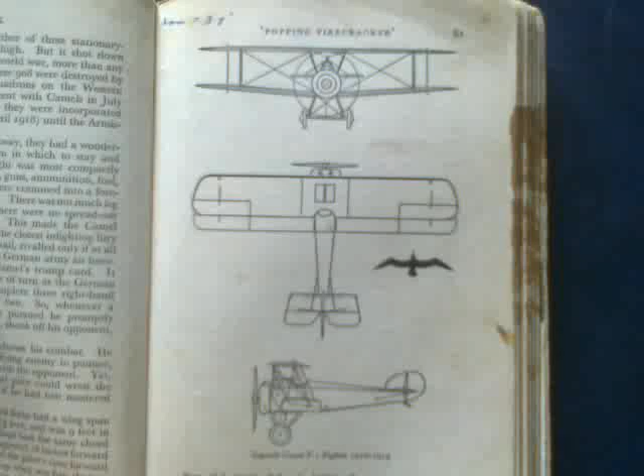Welcome to the second part of my in-depth little warbird series about Sopwith Camels. Those of you who watched part 1 will be aware that part 1 and part 2 are based heavily on text written by Wing Commander Norman Macmillan in Great Aircraft, published in 1960. Part 1 being Popping Firecracker.

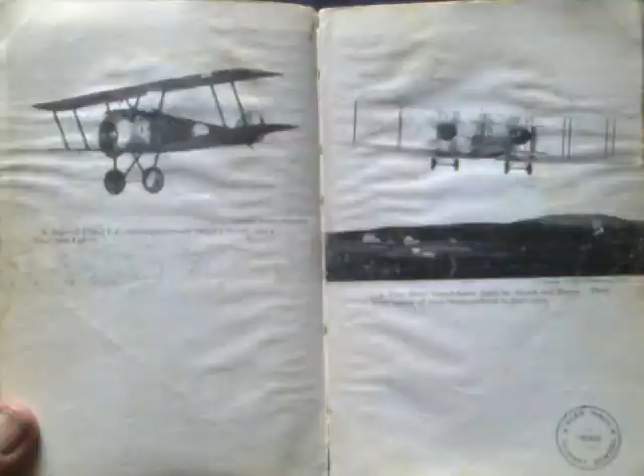Today's video, Ubiquitous Fighter. Once again, I will read from the prepared photocopy, and because this line drawing and this black and white photograph, captioned Sopwith Camel F1, contemporaneously called a Scout, was a single-seat fighter, comprise the only illustrations of Sopwith Camels in Captain Macmillan's otherwise brilliant book.

So I won't be hesitating to dip into my stash of Sopwith Camel photos in various reference books, which I have collected over the years.

Chapter 6, Camel, Ubiquitous Fighter. As twixt two equal armies, fate suspends uncertain victory. From The Ecstasy by John Donne.

The Camel was one of those lucky strikes that turned up sometimes among the varied products of aircraft manufacturers in those unpredictable days when science had not quite overpowered art in the drawing office, and an aeroplane could still be built from the drawings chalked on the wall or the floor of the erecting shop, and a prototype might fly only 3 months after the conception of the design in its creator's mind.

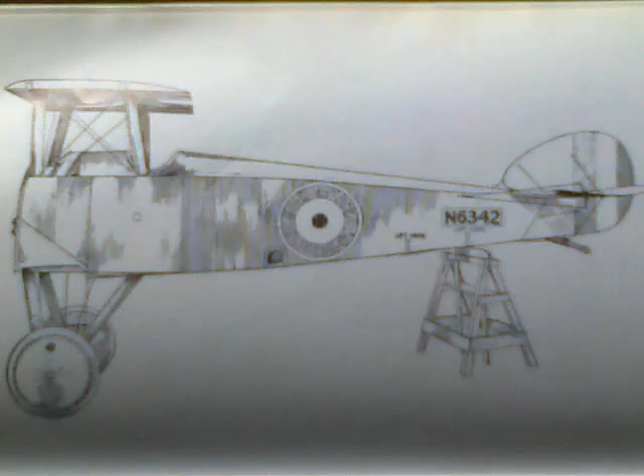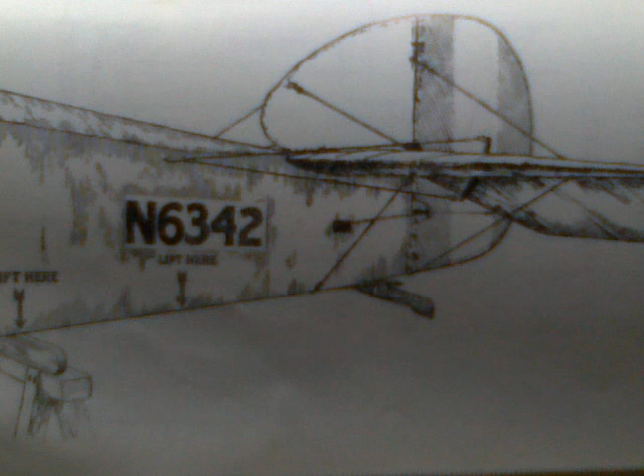There was nothing very unusual about the construction of the Camel. It conformed to the practice of its time when aircraft factories smelt deliciously of clean timber and the sawmill. Its fuselage had 4 ash longerons, square in section and curved lengthwise, to the outlines of the body, which was shaped, either in side or plan view, rather like a coffin.

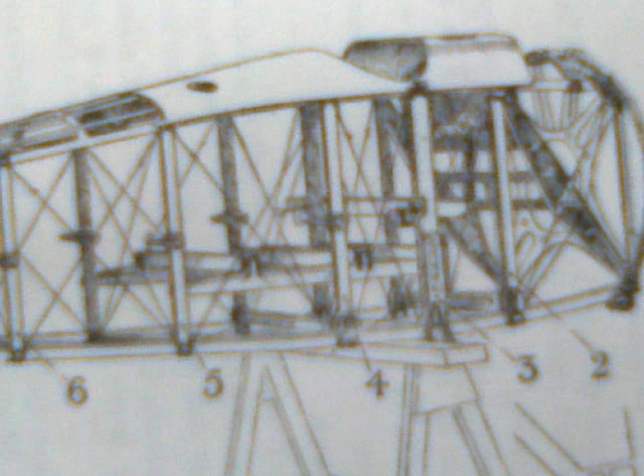These longerons and 8 sets of square section spruce struts, each set containing 2 side and 2 cross struts of the correct length, were the timber components of the fuselage girder. The struts were located on the longerons by steel plates, through whose eyelet holes piano wires were reeved for the internal and top and bottom cross bracings and the side bracings. Each wire was tensioned by a turnbuckle. By correctly adjusting these turnbuckles, the riggers trued the fuselage into correct alignment.

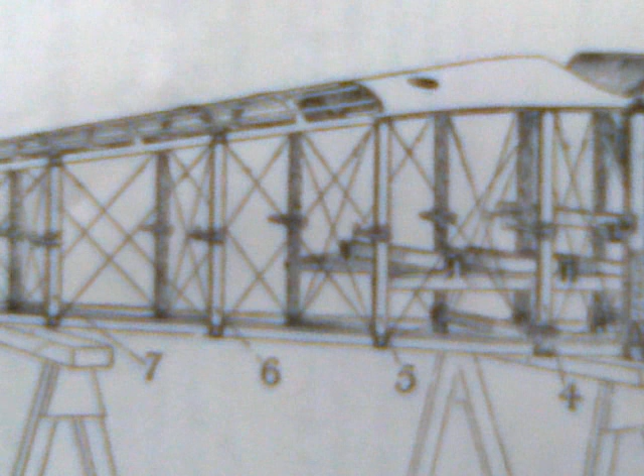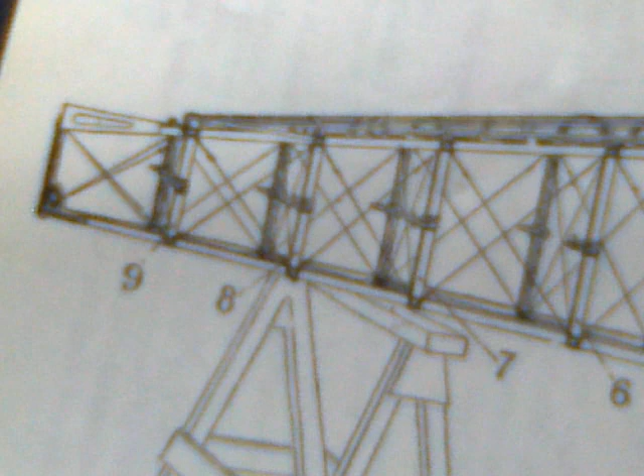A steel vertical rudder post accepted the merging bottom longerons at its lower end, and its upper end similarly accepted the merging top longerons, which here were reinforced by the wood mounting base for the tailplane. By its nature, a rotary engine overhung its mounting. This demanded a good cantilever installation. In the Camel, the one-piece longerons were continued forward from the first set of struts already mentioned to form the engine mounting bay. Their front ends were interconnected on each side by a vertical wooden strut.

Steel fittings on a 3/4 hoop of steel tube that curved over the flat sides and top of the fuselage girder, but not underneath it, linked all 4 longeron ends to this hoop. To this assembly was added the front engine mounting, a steel plate in the shape of a St Andrew's cross, but with a central hole, and the centres of the arms cut out for lightness. In place of the side bracing used further aft, the engine mounting bay was strengthened by a stout wooden strut running diagonally between the front lower corner and the rear top corner.

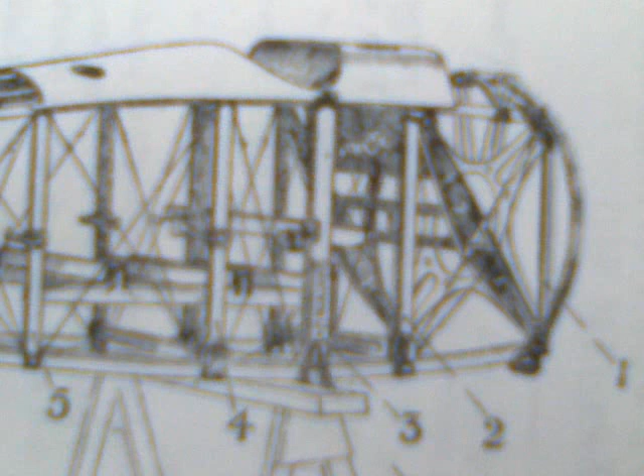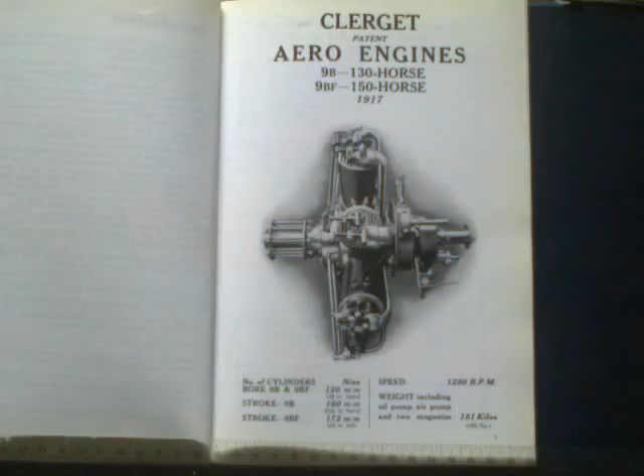To curb elasticity further, these diagonal struts were braced with fore and aft cross wires and laterally by protruding kingpins and wires. The rear steel mounting plate for the engine bolted to these diagonal struts ran centrally across the fuselage within the bay. The rotary engine was mounted in the aircraft by two circular steel plates carried on the rear hollow extension of its fixed crankshaft. The circles of bolt holes on these plates coincided with those on the two steel mountings in the fuselage.

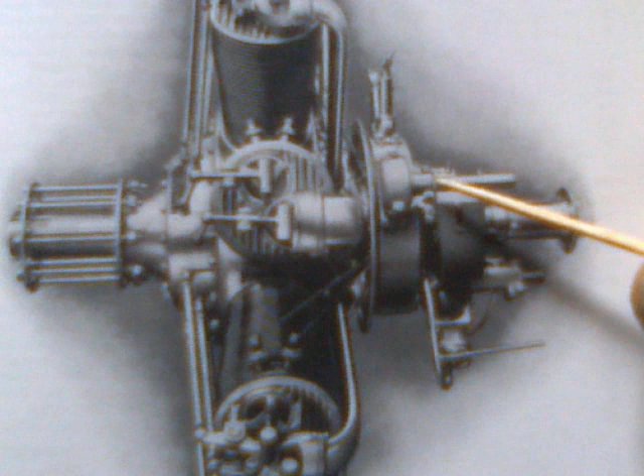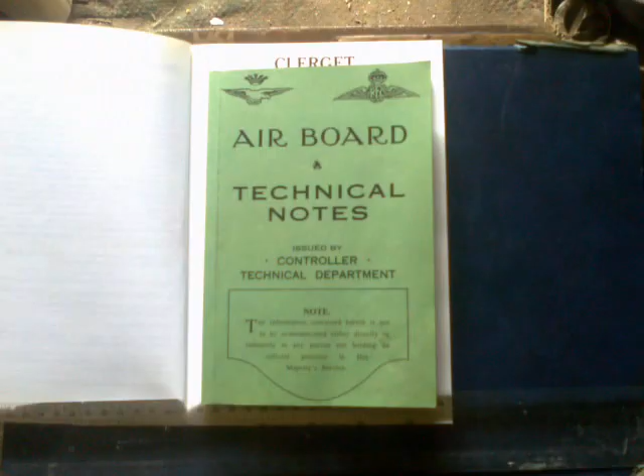Okay, I know it's rude to point, but these are the holes there, and I think there, perhaps around there, but those two steel plates, they hook on. A large plate bolts into that circular hole there, and in that cross member there, there's a vertical support in the centre which can't be seen because of that strut in the way, and the little end bolts onto there. I think that's how it goes.

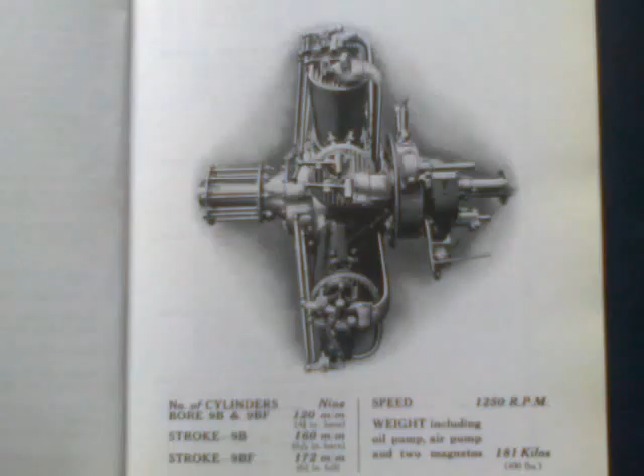Never having laid hands on an actual Camel, a reproduction replica Pup with the wrong engine was as close as I ever got. A simple block tube carburettor was mounted on the open rear end of the crankshaft.

Petrol was fed through a fine adjustment to a jet at one side of the carburettor. From the opposite side, a throttle slid across the opening with a tapered needle projecting in front. This needle altered the flow of petrol through the jet as the throttle setting varied. By manipulating his throttle and fine adjustment levers, the pilot controlled his engine and compensated for varying altitude.

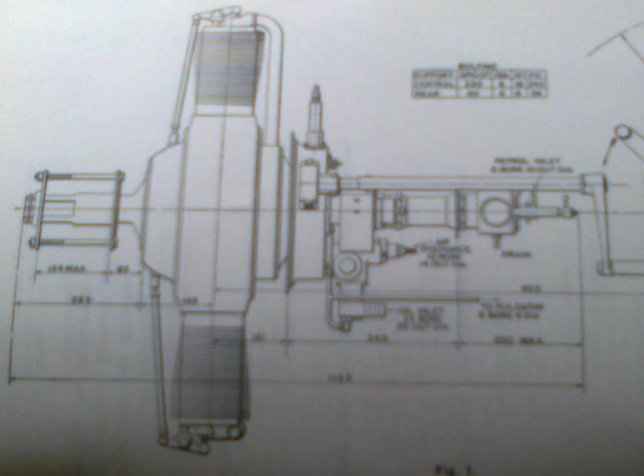By bad handling of these controls, it was quite easy to stall the engine at takeoff or in a manoeuvre, and the novice needed careful tuition in their use. The carburettor sealed the end of the crankshaft and drew its air from both sides through a cylindrical gauze filter just behind the throttle. Rubber connections carried aluminium extension tubes across the fuselage to draw air from the outside.

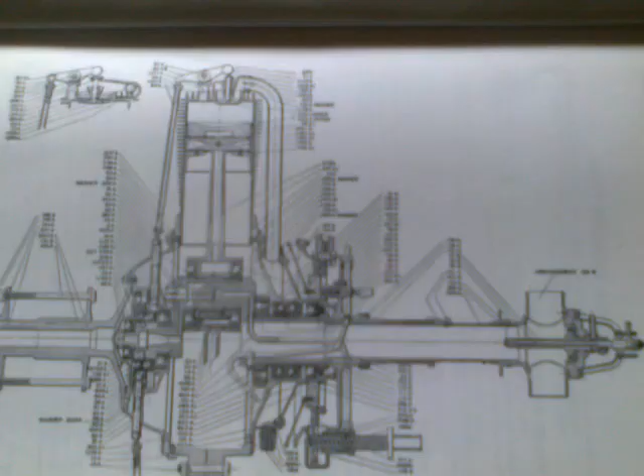The open ends of these intakes are always visible in side views of the Camel, one on either side of the aluminium cowling just ahead of the pilot's cockpit. The other one, of course, is for empty cartridges and spent links to come out from the guns.

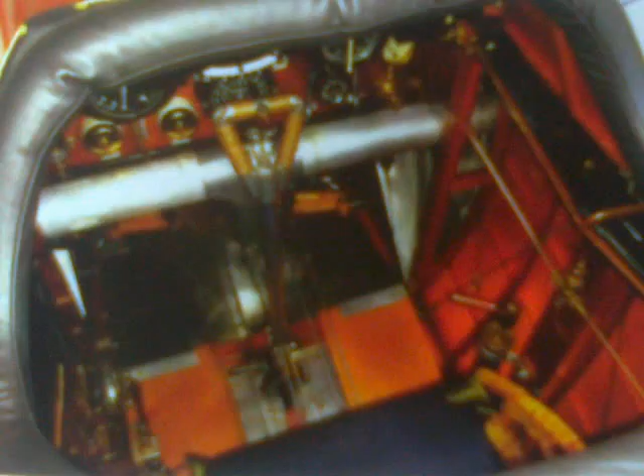These aluminium air intake extensions were the bane of long-legged pilots whose knees fouled them when their feet were on the rudder bar. I have known pilots posted to fly Camels at the front who could not operate the rudder properly because the air intakes obstructed their leg movements, and they had to be sent to squadrons flying bigger machines, such as DH-4 reconnaissance two-seaters.

I have also seen legs broken in Camel crashes by these same intakes, which could not have been more efficiently placed to break the tibia and fibula. The mixture of petrol and air was carried through the hollow crankshaft into the crankcase. Petrol air mix coming down from the carburettor into the crankcase, where it was mixed, heated and partly compressed by the rotating engine and its reciprocating pistons. Thence it was carried to the inlet valve in each of the 9 cylinders through copper induction pipes.

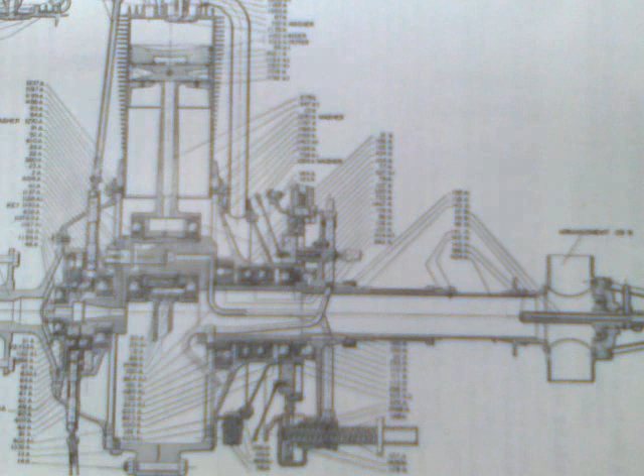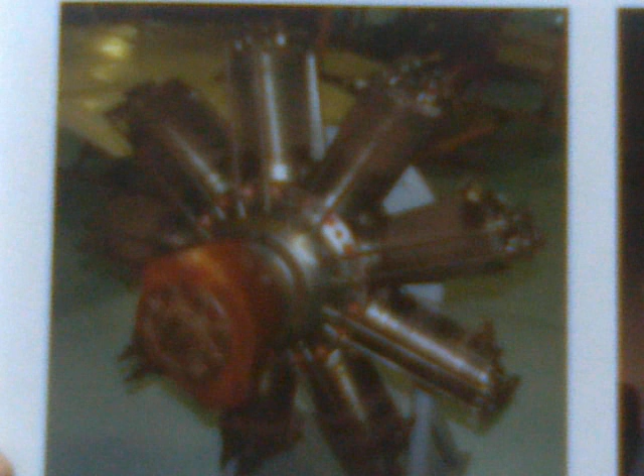There we have the copper induction pipe. There we see the copper induction pipes on a Le Rhône. Somebody's taken them off that Clerget. And there we see the pipes on an 80-horse Le Rhône. Oopsie. The induction pipes are on the Clerget, but they appear to be the cast aluminium variety, and you can only see 2 of them because the other 7 are behind cylinders. My mistake. Both inlet and exhaust valves were mechanically operated in the Clerget, Le Rhône and Bentley engines. The exhaust gases discharged straight into the air, up there.

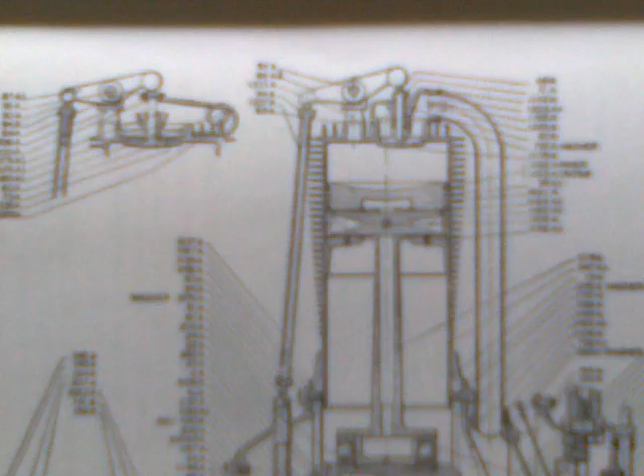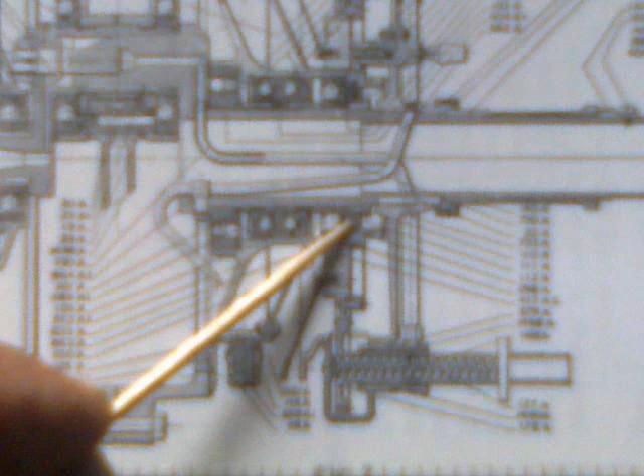The engine was lubricated through the hollow crankshaft from an oil pump mounted on the back plate. There's the pump. The oil pump mounted on the back plate, as the larger rear mounting disc was named, and driven by the rotating engine through gears. And that's where the gears are. There was no pressure gauge on the instrument board in the cockpit, merely a pulsator glass. A small glass dome within which the pilot could see the oil pulsing with each stroke of the reciprocating pump, thus knowing that his lubricating system was working.

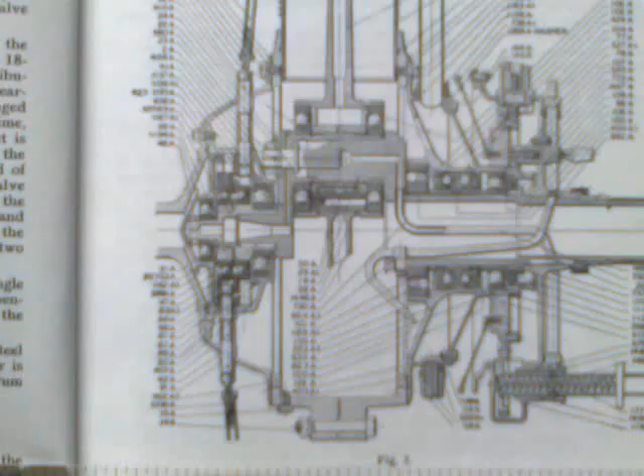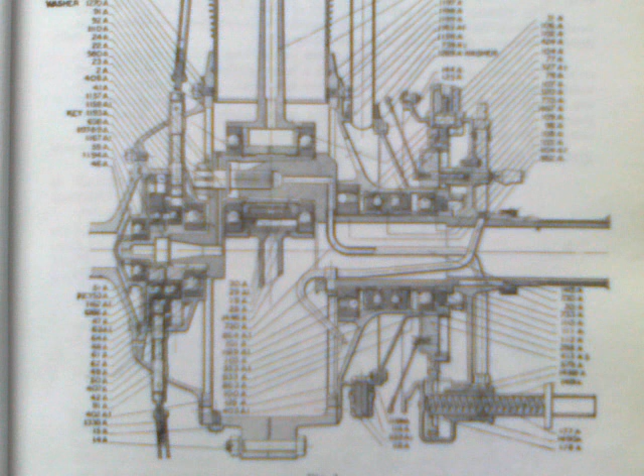Oil leads conveyed the oil to the various working parts. And here we see an oil spray nozzle. We see more oil coming up through the hollow crankshaft, and it just gets pumped into the crankcase. And an oily spray within the crankcase protected cylinder walls from deterioration due to petrol vapour. Because of the mixing of the petrol and the air in the crankcase, it was necessary to use an oil which did not readily combine with petrol, and so would maintain its lubricating properties unimpaired. For this reason, rotary engines were lubricated with pure castor oil.

The common fuel and oil system and the centrifugal force generated by the rotating engine drove an exceptional volume of oil into the cylinders. Some of this oil passed the oil and gas retaining obturator rings, one of which was fitted to each piston, and then escaped through the exhaust valves into the air, half burnt. So these engines were wasteful of oil. They consumed usually about 2 gallons an hour, and their aircraft flew scarcely 50 miles to the gallon of oil. But they continued to be used because they were light in weight and easy to fit, and in the pressure of war there were not enough of any other kinds of engines to replace them.

When taking off, landing and taxiing, rotary-engined aircraft filled the air with the bittersweet fragrance of half-burnt castor oil, like which the world knows no other odour. Indeed, rotary-engined aircraft, when coming down to alight or when taxiing, often trailed a blue mantle of hot, oily vapour.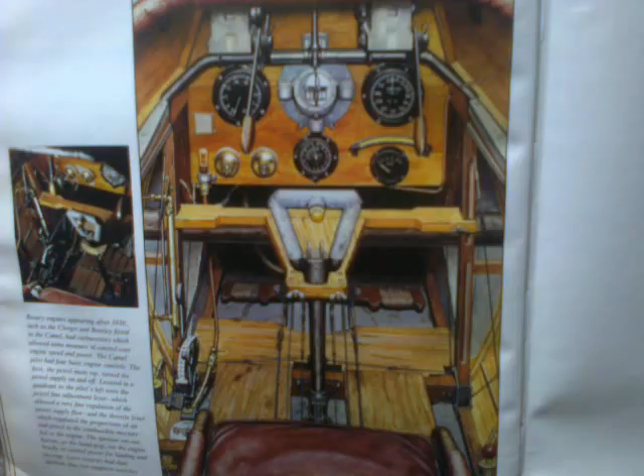Most of these engines would not run slowly without stopping, so instead of throttling down, the pilot intermittently thumbed on a spring-loaded press-button ignition switch on the handle of his control stick, shown there, and again there, and also there. Note that because this particular aeroplane lives in a museum, it doesn't actually have any triggers fitted. Those are the hinge points for the gun triggers, a feature which the artist has faithfully reproduced.

Returning to Macmillan, pressing this switch stopped the engine from firing. Releasing it allowed the engine to start firing again. By switching his engine off and on, the pilot controlled its average speed, and thus reduced the thrust of his airscrew and altered his flying speed and angle of glide to suit his judgment when landing, and his taxiing speed on the ground. When this thumb switch, commonly called the blip switch, was used, pilots were said to be blipping the engine or blipping into land.

There was a great art in blipping, but however it was done, the procedure always increased the volume of hot oil thrown into the air, thus creating the blue mantle. Wherever rotary-engined aircraft flew, especially those with Gnome Monosoupape engines, that's French for one valve, which had no throttle at all, oil splashes fell from them. White tents about their airfields were soon mottled by patches of oil, as if camouflaged.

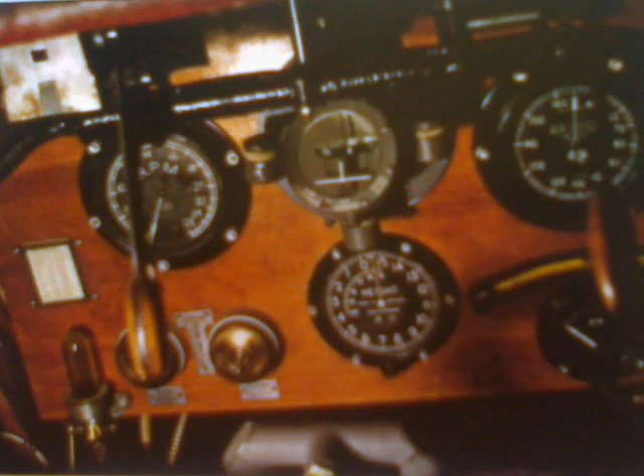Pilots who flew such aircraft necessarily inhaled castor oil fumes and were absolved from any need to take aperient salts in the mornings. But this effect was not drastic, as has sometimes been averred by writers (and talkers) who never ever flew them. Bit of a side note here. For the benefit of people who are not aware of the bowel fetishes, fixations and habits of the average Edwardian, what he was saying was that even though you were breathing castor oil, it didn't give you diarrhea, although a lot of people have written stories about that.

The Edwardians and the Georgians were fixated about their bowel habits because they ate pretty much nothing but starch and decomposed meat, and they tended towards constipation. And before antibiotics were invented, getting constipated could lead to a bowel obstruction, which led to a dangerous operation with about a 50 or 60% death rate to try and clear the obstruction. So they lived in constant fear and trembling of becoming constipated. So a lot of them every day had a teaspoonful of castor oil to lubricate their innards, so to speak. They were also too polite to talk about it in public places. But that's what that sentence meant. Okay, now you've got the key.

Pilots who flew such aircraft necessarily inhaled castor oil fumes and were absolved from any need to take aperient salts in the mornings. But this effect was not drastic, as has sometimes been averred by writers and talkers who never flew them. Aperient salts, read Epsom salts. Upset the electrolytic balance of your intestine and you will develop diarrhea and wash away the obstruction caused by eating stodge.

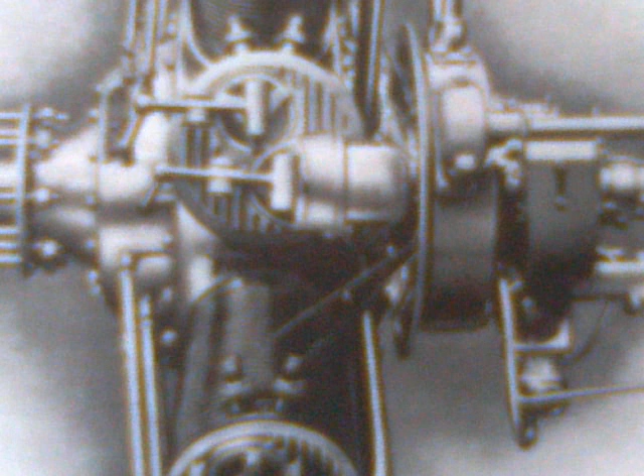The rotary engine's magneto was mounted on the backplate. Through gears, it was driven 2¼ times faster than the engine. A high-tension lead carried the spark to an insulated brush holder in the backplate. The brush holder passed the current to a distributor mounted on the rear end of the crankcase thrust box. This distributor revolved with the engine, and the position of each terminal was in line with the sparking plug screwed into the side of each cylinder head. A fine brass wire carried the spark from distributor to plug.

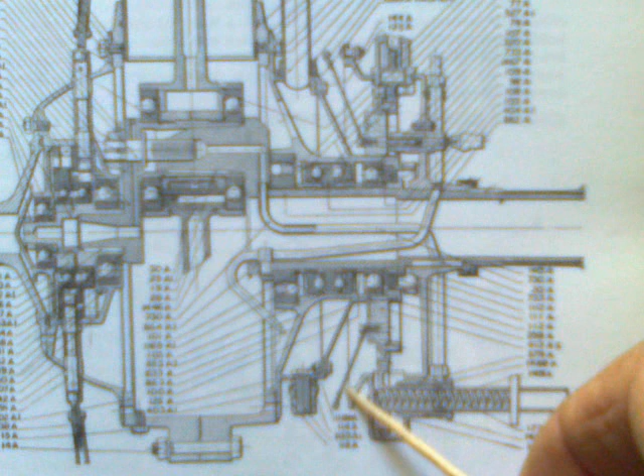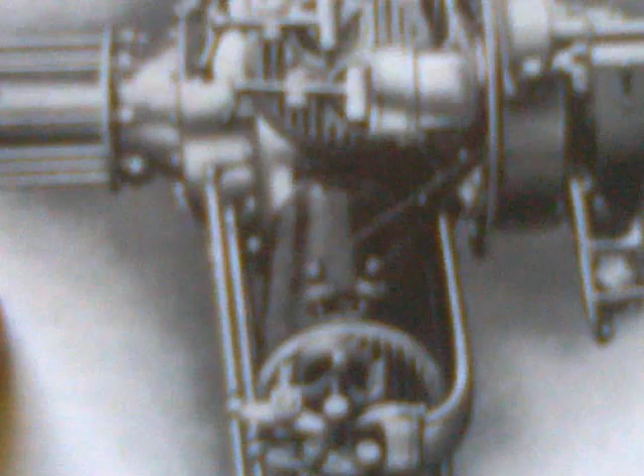Now, there's the wire there, and there's the wire there, depicted in the diagram. The wires will emanate from in front of that shield and behind the back of the crankcase and come out there. Same there. And here you see them emanating and running to this. The engine has 2 plugs per pot. Single ignition, twin plugs. Ideally, only one of them is going to get clogged up with oil.

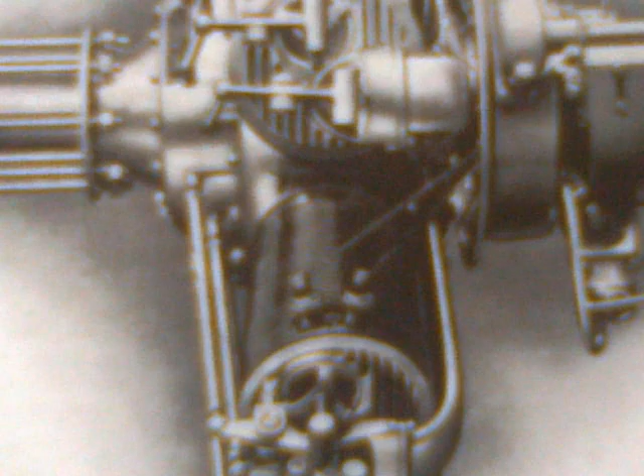Not infrequently, these fine wires broke, and this caused the engine to misfire. Indeed, it is surprising that they did not break more often than they did, as they too revolved with the engine. The quickest way to immobilize the aircraft on the ground was to unfasten the inspection panel in the metal side cowling and pull the high tension lead off the brush holder in the backplate. I have seen considerate flight sergeants do this when they thought it wiser not to allow a pilot, slightly inebriated after some jollification, to fly.

Imagine flying that drunk.

The fuselage was divided into 9 bays with 8 sets of struts between the engine mounting and the rudder post. For the convenience of riggers, the engine mounting was called number 1 and the 8 succeeding sets of struts were numbered 2 to 9. The V undercarriage legs were attached to steel fittings at the longeron and base of numbers 1 and 3 struts. The lower wings were attached to fittings at the base of numbers 2 and 4 struts.

Between numbers 3 and 5 struts, fore and aft transverse wooden members provided the foundation for the pilot's wicker seat, and behind it the main petrol tank. The top deck of the fuselage, from slightly ahead of number 2 strut to number 5 strut, was made of plywood, whose forward part was the hump, succeeded by the cockpit opening, after which the coaming sloped downwards towards the tail. In this rear portion, 2 circular holes gave access to the petrol filler caps of the 5-gallon gravity tank,

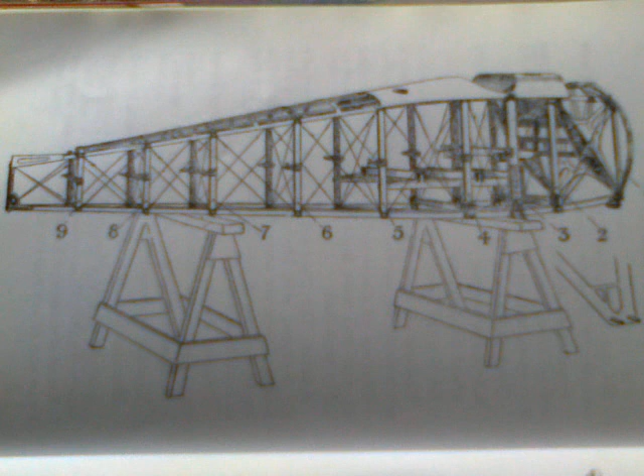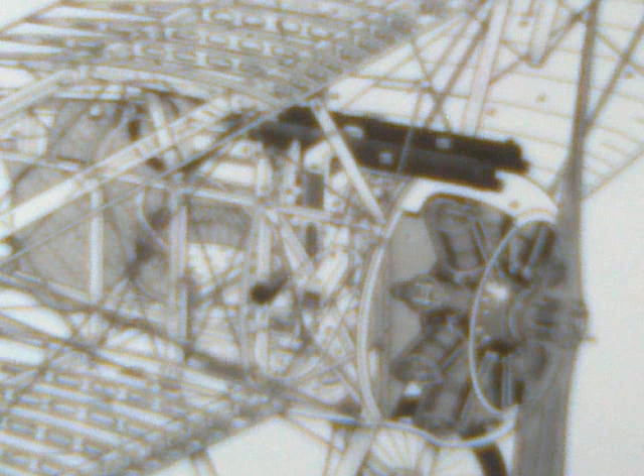This bay was enclosed by aluminium panels front, top, sides and bottom, with large oval and quickly detachable servicing panels on each side. The transverse air intake tube apertures were just behind these detachable panels. The starboard side panel fitted over the chute for discharging used cartridges ejected from both guns. Spent cartridges mostly fell on the starboard lower wing, but their drumming on the fabric was deadened by the chatter of the guns firing.

The second and third bays were covered with plywood. Aft of the plywood, fabric covered the fuselage. The fuselage top and sides were painted a drab khaki brown, relieved only by the Royal Flying Corps roundels on each side. The white painted aircraft identification letter, A to S for 18 aircraft with the letter I omitted, in front of each roundel, and behind the roundels, the squadron's identification symbol in white on the top and the sides. The service contract letter and number were painted in white or in black on a white rectangle near the tail, or sometimes on the fin.

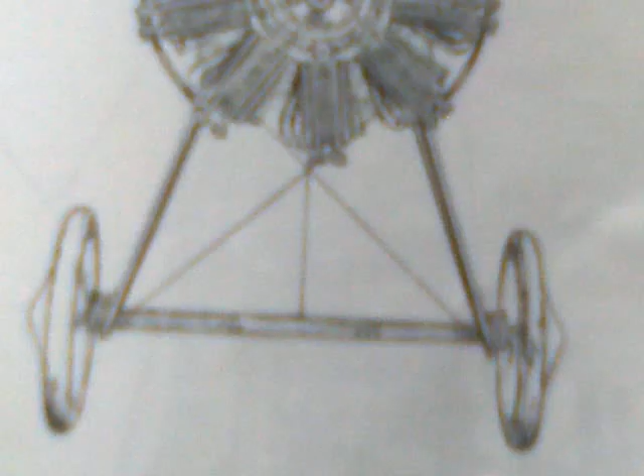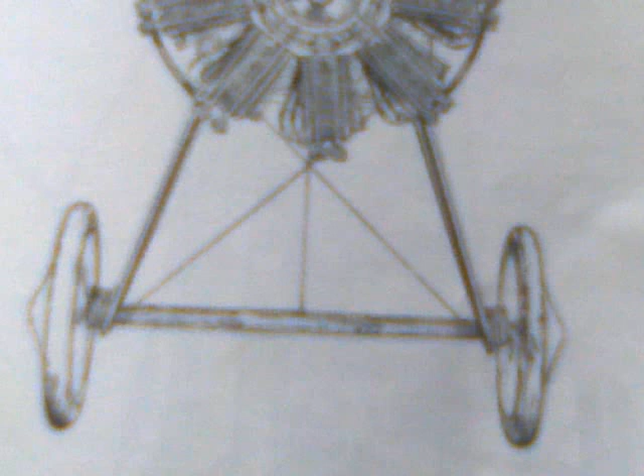The streamlined steel tube undercarriage V-legs were not retractable. Their apexes were connected by 2 spreader rods of steel, and the whole structure was braced by 3 streamlined steel wires. Steel half axles, hinged at the centres of the spreader rods, carried a wire-spoked wheel at each outer end, giving them a track of 4.5 feet. Rubber elastic cord was wound over fittings on the outer apex of each V-leg and over each axle between the V-leg and the wheel bearing. This cord and the high-pressure 700 by 75 pneumatic tyres absorbed the shocks of takeoff, landing and taxiing. There were no brakes. The wheels were partly streamlined by fabric side covers.

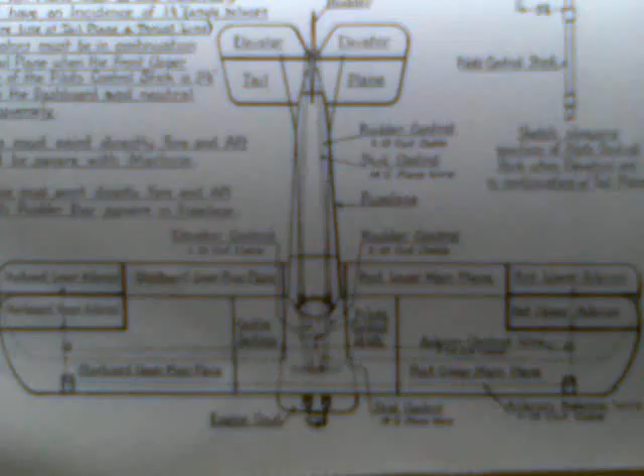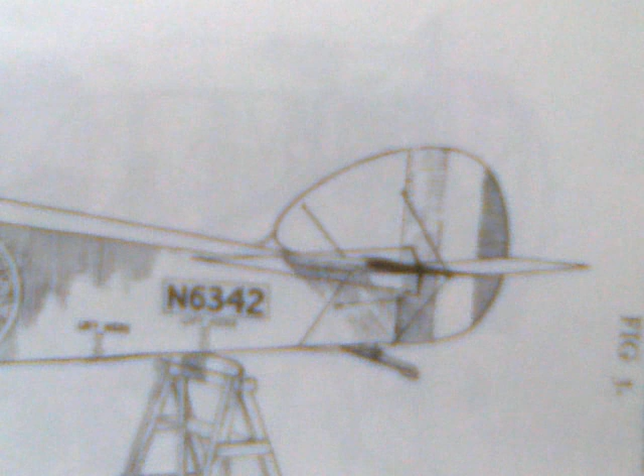Port and starboard, the steel tube rear spar of the fixed tailplane was braced top and bottom to the rudder post by streamlined wires. The spruce front spar was similarly braced to the fin and bottom longerons. The tailplane ribs were of spruce, the leading and outer edges of steel tube. Elevator, fin and rudder were steel tube frames. The elevator and rudder had steel strip ribs. Excepting the rudder, their fabric-covered surfaces were painted like the fuselage.

The rudder bore the vertical blue, white and red stripes of the British identification on either side. The elevator was operated by single 1500-weight cables running above and below the tailplane on each side of the fuselage. The elevator was cut away in a V in the centre to allow for movement of the rudder, but its port and starboard halves were interlocked, so that if any one cable was shot away, its duplicate on the other side would operate the complete elevator.

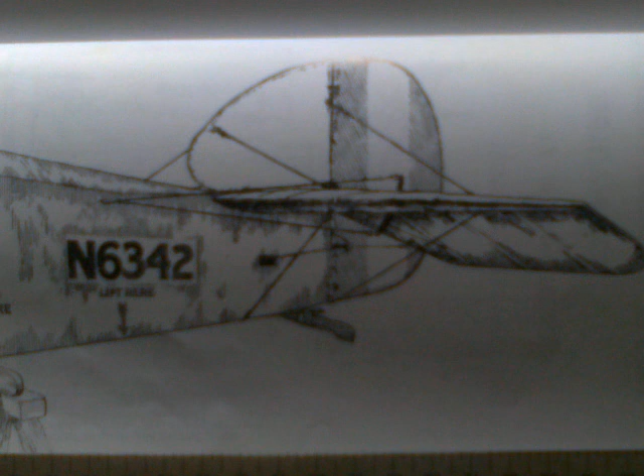The rudder was operated by two 1500-weight cables on each side. The steel shod wood tail skid was sprung by rubber elastic cord and was steerable from the pilot's rudder bar through 14-gauge piano wire. You can just see the steel shoe on the wooden tail skid.

The wings had two spars, all except the lower rear spars being milled into I section for lightness. Spars, ribs and compression struts were all of spruce. The wing structure was wire braced internally. The two lower planes were attached by rods passing through steel fittings at the junction of the bottom longerons with numbers 2 and 4 vertical struts and the fuselage compression struts corresponding to the wing spars.

These two stout compression struts ran horizontally across the fuselage and formed the lower centre section of the wing structure. In the prototype Camel, the top wing was made in one piece, but in production machines it was divided into three parts.

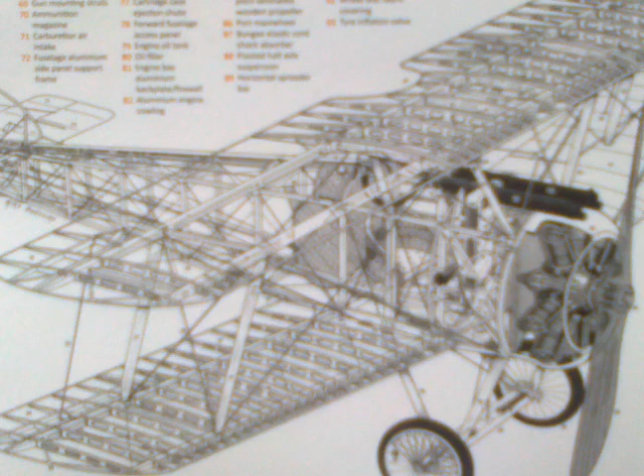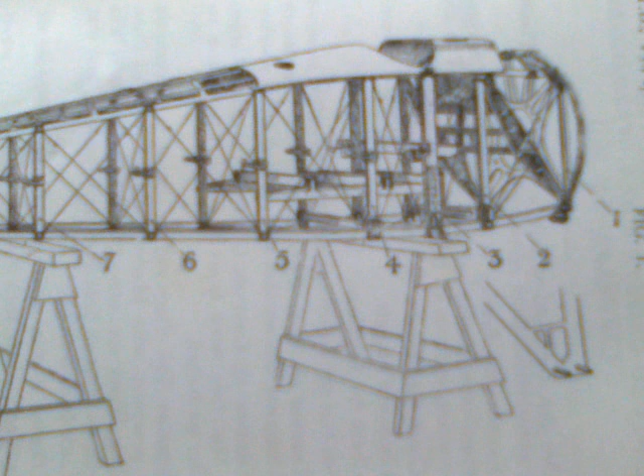To carry the wide centre section of the top wing, which had an open window to improve the pilot's upward view, four streamlined spruce struts, cross-braced in front and on both sides, sloped upwards and outwards from the upper ends of the same fuselage vertical struts, whose lower ends accepted the undercarriage loads.

Thus, a bad landing often slackened the centre section bracing, and if this were not attended to, trouble might ensue on the next or subsequent flight. Consequently, when I commanded an instructional flight group of Camels, every pupil was ordered to report each heavy landing, and my flight sergeant was instructed to have the centre section bracing checked after each flight, whether a pupil or an instructor had reported a bad landing or not.

Perhaps it was partly through these precautions that we never had a Camel casualty despite ample aerobatics.

The right and left upper planes were attached by fore and aft rods to the centre section spar fittings. Two spruce streamlined interplane struts, adjusted and braced fore and aft by streamlined incidence wires, aligned the top and bottom planes outboard. Each spar was braced by double lifting and single landing streamline wires.

Roundels were painted on the upper surface of the top planes and on the lower surface of the bottom planes and their ailerons. Their diameter was the chord of the wing, and the inner edges of the circles were aligned on the inner edges of the ailerons.

Elsewhere, the upper surfaces were painted the same as the fuselage, but the under surfaces were painted a light colour to make the aircraft less readily seen against clouds and sky, and this lighter colour was also used on the bottom of the fuselage, where the half-burnt castor oil covered up the light-coloured paint and gave a more or less browny black fuselage underside, and also the root ends on the lower surface of the lower wings.

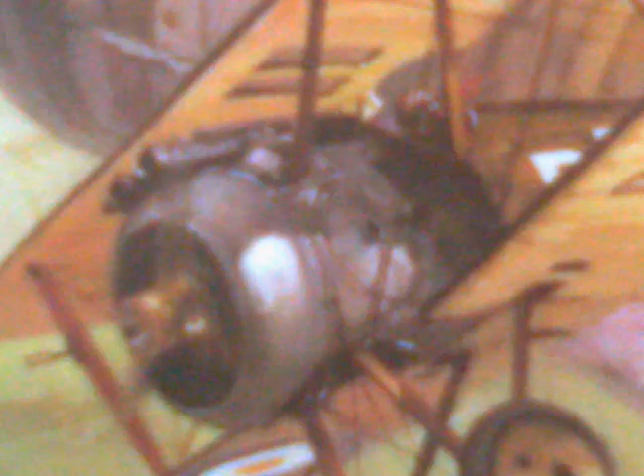Its pitch was non-adjustable. The 2 installed Vickers machine guns weighed 70 pounds. Their two belts of .303-inch caliber ammunition weighed 31 pounds.

Tracer, solid, armour-piercing, and sometimes phosphorus incendiary bullets were used in proportions laid down by regulations, or occasionally in accordance with a pilot's fancy. Tracer bullets were used to assist aiming. They also appeared to increase the chance that a stricken enemy machine would catch fire, even without the additional hazard of incendiary bullets. Either gun could be fired singly or both together by appropriately pressing two thumb triggers mounted side by side within the spade grip handle of the control column.

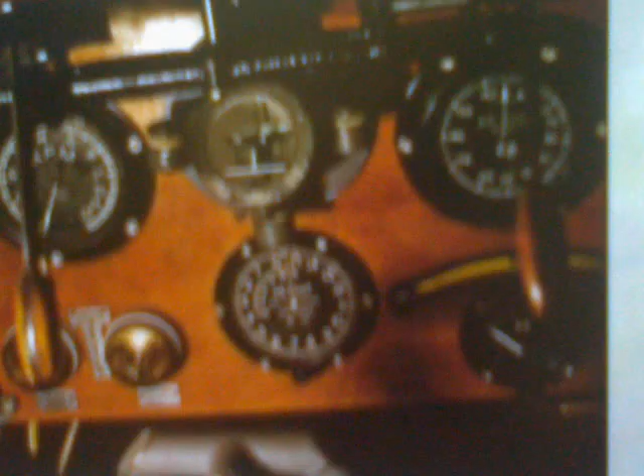But not until the pilot had loaded the breeches by means of a Hyland loading handle, seen here and here, one for each gun, that made it easy to operate the cocking handle.

The guns had Ferroto jam clearers, but a hammer was more effective. Pilots were expected to use their gun sights, and the standard Camel mounted both an Aldis tube sight and an open ring and bead sight.

You can just see the ring of the ring and bead sight there. And this one has no Aldis telescopic sight. So we'll go back to the 4 Squadron Australian Flying Corps Camel, and it features a ring and bead sight on the right-hand gun, an Aldis telescopic sight, and a reverse ring and bead sight on the back end of the Aldis. Okay, photographic evidence.

It is on record that one pilot added a reversed bead and ring because it looked more warlike and symmetrical. His Camel caught Major General Trenchard's eye when he visited the squadron, and it aroused his interest and enthusiasm.

"This is what I like to see," he boomed to the squadron commander. "Shows a keen pilot who makes use of the equipment we give him." Perhaps in the general's mind was the thought that this scheme might be standardised for the whole corps. He turned to the pilot and asked him how he used his 3 sights. To his astonishment, the gallant and truthful youth replied, "I never use any of them at all, sir. I just point my nose at the enemy, hose away, and hope for the best."

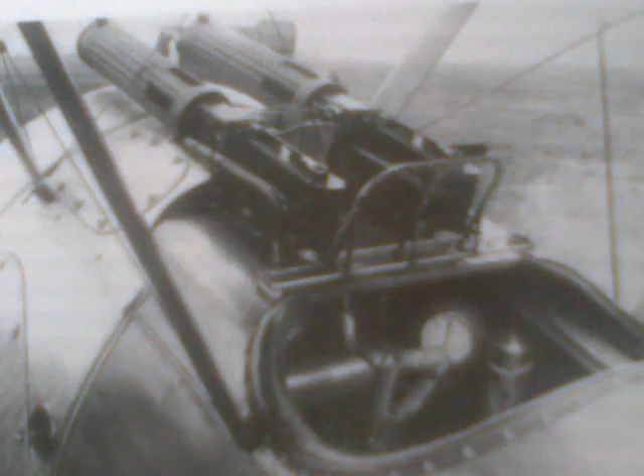The gun butts were in the cockpit just below the plywood coaming. In a nose-in crash, the pilot was thrown forward and only too often bashed his face against the gun butts. The resulting facial damage, broken nose was common, was seldom incurred without permanent disfigurement, and such unfortunate pilots were afterwards known as having a camel face.

The guns were fed from the magazines with the cartridges formed into a continuous belt by aluminium clips, which disintegrated and were an improvement on the earlier one-piece fabric reinforced with metal feed belts, which often wrinkled and so caused feed jams. The clips were discarded and ejected with the used cartridge cases down the ejector chute.

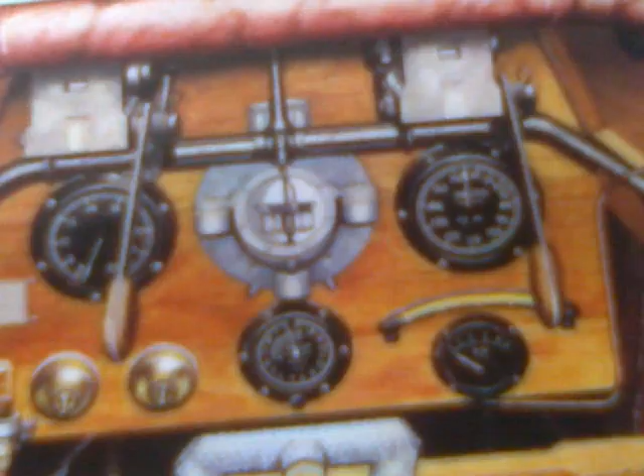The instruments were simple: an altimeter, engine revolution indicator, airspeed indicator, and a cross-level or bubble inclinometer. There's also a small compass, right there in the centre. In theory there's a watch - that's either a data plate or where the watch is supposed to be mounted. There's an air pressure gauge for the main petrol tank feed, and a pulsator glass for the oil feed. The cockpit also contained a hand-operated fire extinguisher, though I can't see it either.

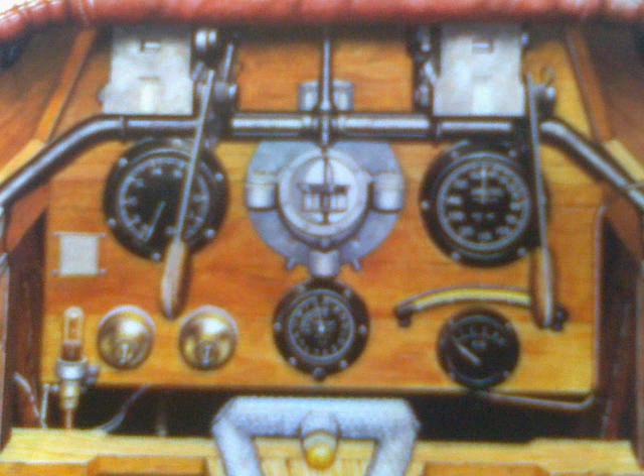Camel manoeuvrability demanded something new in safety belts. Early pre-war flyers had flown without any, some even sitting on the wings without a nacelle to protect them. When the Frenchman Pegoud first introduced the loop to an astonished world in 1913, he simultaneously introduced the necessity for safety belts. When the Camel first appeared, it was fitted with an abdomen belt about 4 inches wide, attached to the rear support for the seat. The first one I encountered had elastic sides, presumably for comfort. But if one pushed the stick forward, its response was so swift that the pilot was shot forward and upward when the aeroplane shot downward in a dive - the elastic-sided belt then expanded and allowed the pilot to slip through its embrace.

On one occasion, I was thrown out of the cockpit and found myself lying on top of the gun barrels, with my nose perilously close to the whirling propeller. Pilots soon overcame that danger by turning the Camel over sideways to start a dive. But even so, some better safety device was necessary.

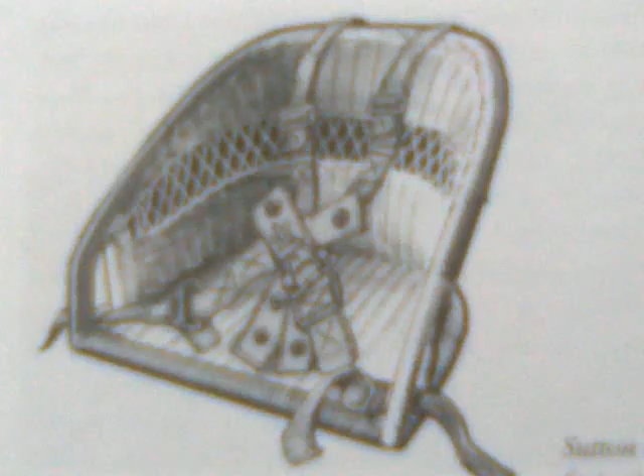It was then that Captain Oliver M. Sutton invented the Sutton harness. This had 4 straps, 2 across the top of the thighs and 2 over the shoulders. All 4 straps had metal reinforced holes of close pitch. The appropriate holes were passed over a conical steel pin, and a spring clip was pushed across the top strap through a hole in the pin. The pilot was then securely held in any attitude of the aeroplane, yet could release himself quickly by merely withdrawing the clip. The harness of today is simply an improved version of the Sutton harness, but the name of Sutton is long forgotten by all but pilots of the First World War. Sutton, who won the Military Cross in that war, received scant credit and no recompense for his practical solution to the problem of belted safety for the pilot.

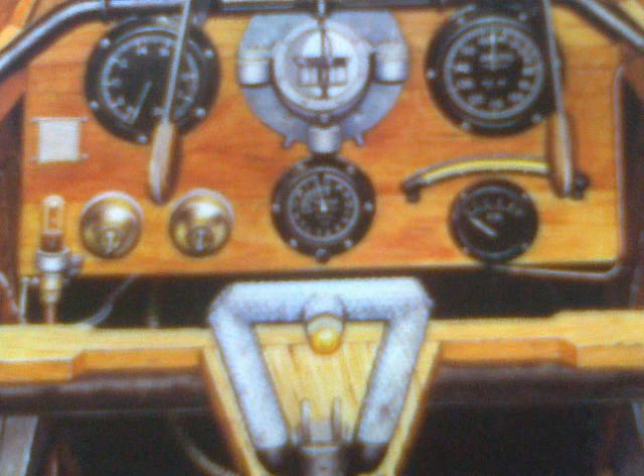The inclinometer was merely a glass tube spirit level, slightly curved instead of straight, set in an aluminium frame marked off in angles of 5, 10, 15, 20 degrees. It was mounted across the aeroplane in the centre of the instrument board, slightly off-centre. It was the progenitor of instrument flying. Its function was to indicate side slip when flying level or turning. Perfect flying, of course, maintained the bubble always equally divided by the line marking the exact centre of the instrument.

Like the ordinary spirit level, it was a precision instrument, which was all very well for instructing novices and for peaceful flying, but it was valueless in combat, when one flew according to the exigencies of the moment and there was no time to look at instruments. The air bubble was the only moving part, and the inclinometer's life was infinite unless its glass were broken. But one wag who prided himself on his flying sent in an official request for a new inclinometer, on the grounds that his old one was worn out in the centre.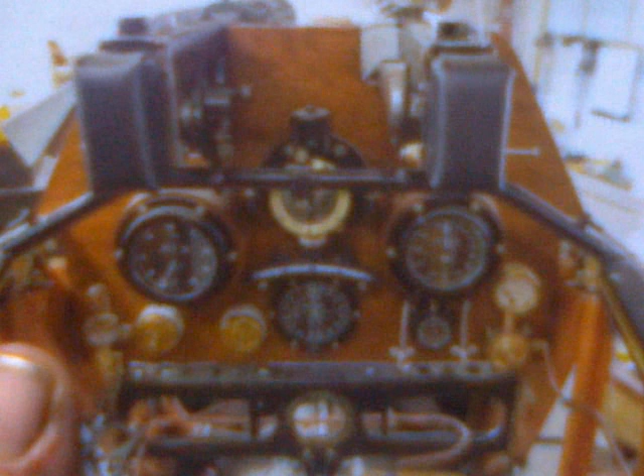The Sopwith Camel was also carried by airships, and air-launched as the airship's fighter escort. Well, what do you know - there's a Camel with its inclinometer in the centre of the panel, just as the description said. On 19 July 1918, 7 Camels took off from the Furious aircraft carrier, each carrying 2 50-pound bombs.

They destroyed 2 Zeppelins in their hangar at Tondern, 80 miles away. On the 11th of August 1918, a single Camel took off from a lighter towed by a destroyer in the Heligoland Bight and from nearly 19,000 feet shot down in flames the last Zeppelin to fall in the war. This, then, was the Camel, of which 5,490 were built in 1917 and 1918.

By far the greatest number were Clerget-engined. Next came those with Le Rhône or Gnome Monosoupape engines, and a much smaller number with Bentley engines. There was a special naval version designated 2F1 for shipboard use, with 13 inches smaller span and a fuselage that could be quickly detached at the number 5 struts for easy stowage.

There were other differences from the F1 Camel, and of these the most important was the removal of the starboard Vickers machine gun and substitution of a Lewis machine gun on a Foster mounting on the centre section of the top plane, which enabled the rear end of the gun to be pulled down for changing ammunition drums and for firing upwards when attacking Zeppelin airships from below.

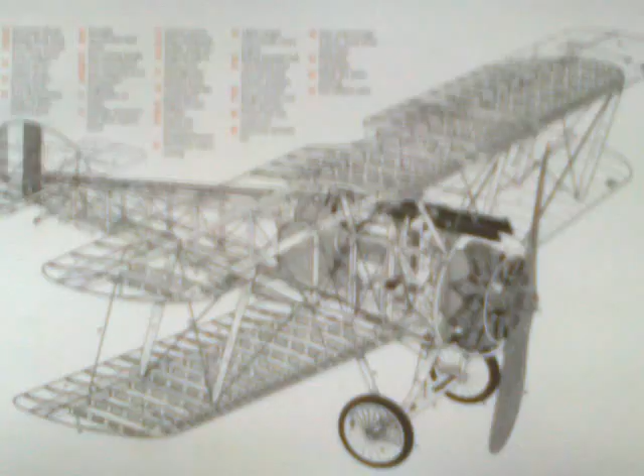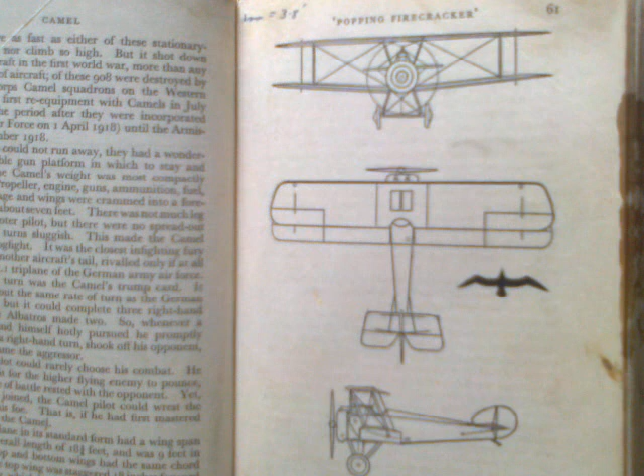And that thought brings me to the conclusion of Camel Warble video number 2, which brings us to the conclusion of the original material from the 1960 edition of Great Aircraft by Captain Norman Macmillan. In the third video in this Camel-centric series, we'll have a look at what modern aerodynamics and aeronautical engineering has to say about the layout of the Camel, how they achieved what they wanted to achieve, which was an aeroplane that would be hard to shoot down, because they were sick of aeroplanes that were easy to shoot down because they'd been designed and built to be easy to fly, and therefore you couldn't take evasive action in them. You were better off getting up and running around outside the cockpit of a BE-2C or an RE-8 than trying to actually aerobat the aeroplane. Anyway, that's for the third video.

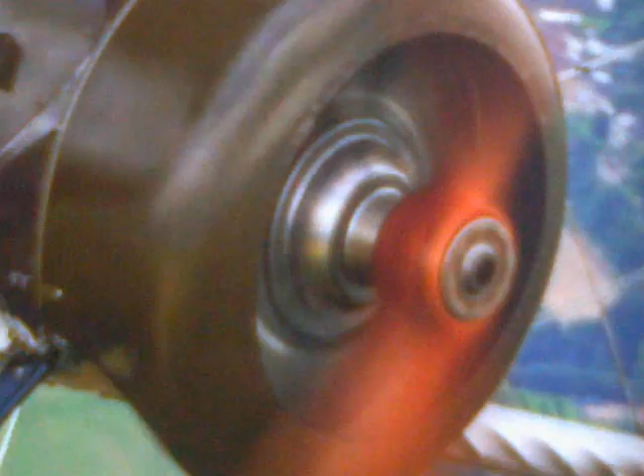1,250 to 1,300 RPM, and at full throttle in a dive, you run them up to 1,500 RPM and their insides would melt and drip. I wish I had one to play with.